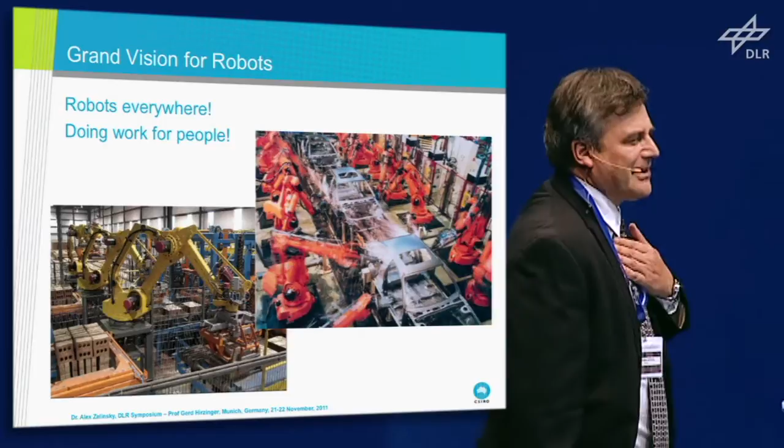If I think about the grand vision of robotics, if you ask anyone when we all started in this field 50 years ago, it's robots everywhere doing work for people. That's where we always thought it would be. However, I think the vision is changing somewhat, but to me it's actually robotics everywhere.

Instead of robots populating the environment—we saw some fantastic talks before lunch from Professor Inoue and Professor Inaba talking about the robot—but I think there's something more there. Our technology can go everywhere in the environment. In other words, robotics is, as Michael Brady says, the intelligent connection of perception to action. That opens up a whole vista of opportunities where we can have robotics.

So imagine, instead of a humanoid robot maybe driving an ordinary car, you could have the car being a robot of sorts. And going further, there's interesting ideas of these sensor networks, which are small devices with microcontrollers, radios, and sensors, populating the environment and working together, gathering information.

That creates a very interesting new paradigm. You can sense and they communicate to each other, then from some gateway go to and maybe control soil moisture, and you can precisely water a farm exactly where it's dry.

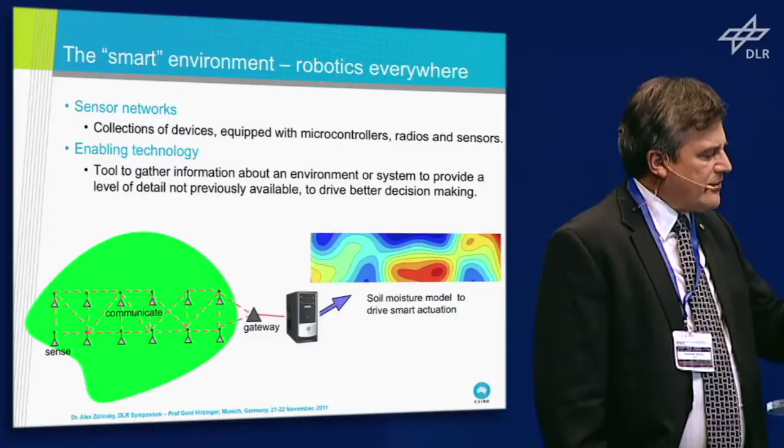That's a kind of classical model, but with robotics everywhere, I believe we can change this paradigm where we actually compute inside the network and act, doing the actuation, rather than pulling information off and sending it centrally. These are the sort of things now possible with the robotics technologies we have today—in-network decision-making and actuation.

I put this slide in a video. Most people who know me know I've never done much work in humanoids, and I always said I can't find an application. I have an application, finally.

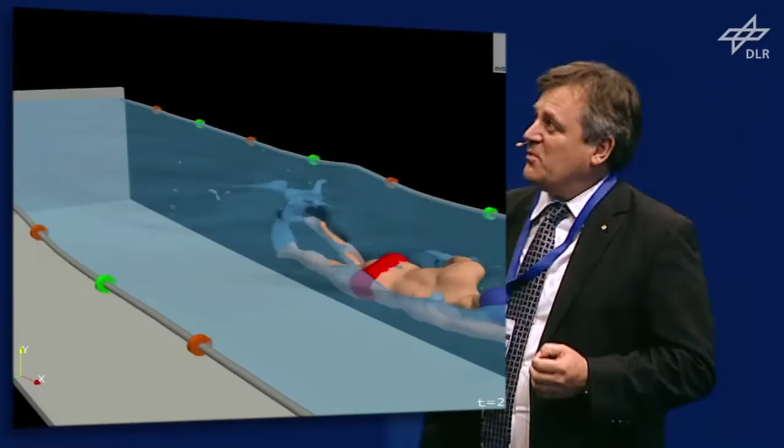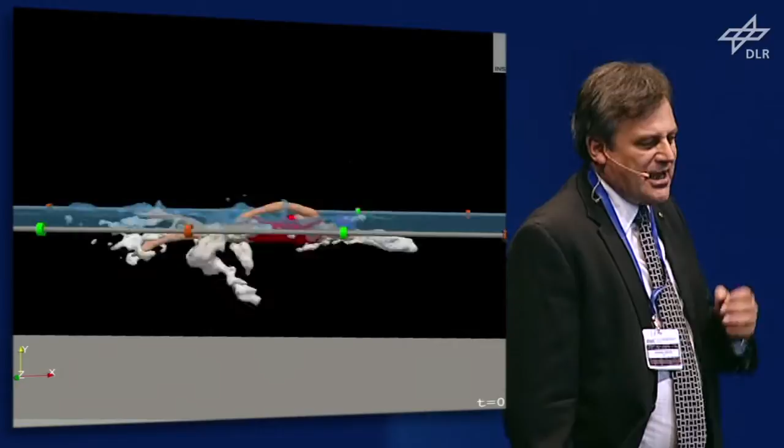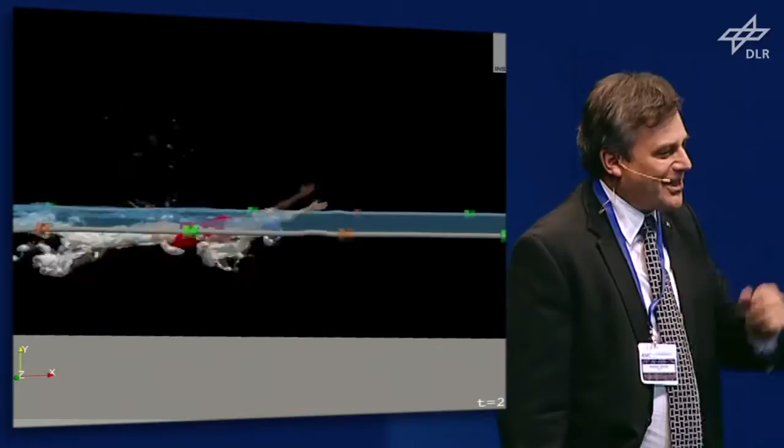This is what we're doing with the Australian Institute of Sport—we're helping train athletes for the next Olympics. We've captured all the motion of the swimmers, and we have a full computational fluid dynamics environment of the water, so you can analyze how the swimmers swim. Using the work of my colleagues in the humanoid area, we've been able to control the swimmer to see if they change the stroke, can they actually go faster, so the coach can coach them.

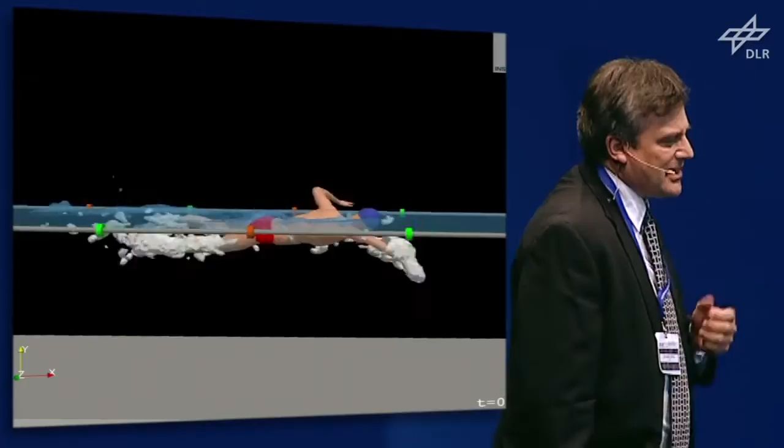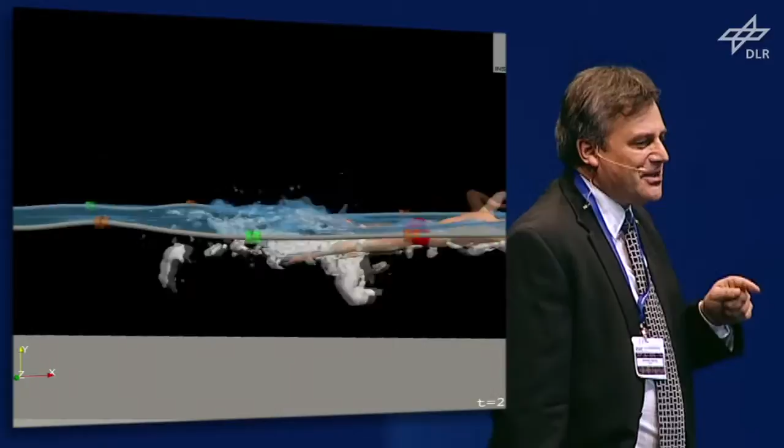So we've actually been able to get this. So when you look at the Australian swimmers in London next year, look for the gold medals from us. So anyway, hopefully this technology contributed.

So really, what are we trying to do with robotics? It's robots for service, and I think we have to remind ourselves why we actually want to have robots. A lot of times when I started, and many of my colleagues and students started, it was just to build something cool and do nice things with technology. But at the end of the day, if you want to create technology for society or for the markets, you've got to do something more effectively, efficiently, reliably, and safely, and deliver a service of value to customers. Someone will actually pay you for it, or a company, or somehow.

I think those things, we sometimes throw away at the beginning. Don't want to do it reliably? Well, if you can't do it reliably, it's probably not going to be of much use. And safely is the other very big point, and I heard that in some of the talks this morning.

So there's a couple of examples there, of course the iRobot, and then I think one of the great examples of a robot is really the elevator. Many years ago, people had to have an operator to take you up and down. Now these things are quite intelligent and they can communicate to each other. They can determine if it's too heavy, when it needs to be going to maintenance. They can optimize their schedules and control each other. Quite an amazing system—very reliable, efficient, and safe, and creates value for customers.

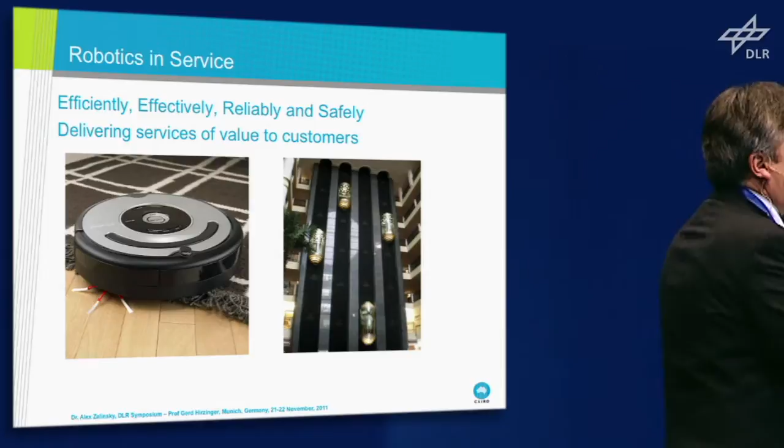So that's the kind of thing we should be aspiring to. We might not think of an elevator as an intelligent robot, but actually in my bones it's robotics in the environment—it's got all the characteristics of what we look for. These are the sort of examples we should be seeking to match.

The other one I think people always look at is safety and liability issues. I know Sebastian's doing fantastic work now for Google with the Google car, after the Grand Challenge, etc. But there is a real fundamental problem here: who bears the liability risks? This is something you really want to understand if you want to bring a product to market. Is it the public? Is it the manufacturer? Is it the owner, or the person who operates it?

Generally what's happened in all sorts of automation and technologies, the manufacturers have been able to shift the liability onto the owner or onto the public. So if you actually create this technology, you must be very, very sure who takes the liability. Currently I think Google has to take the liability—it won't be the car company, it won't be the driver, because you're not driving the car, something else. This may actually limit fantastic technology going forward.

One example we can think of is pilots. We have autopilots—you can actually go in a plane and the plane would fly without a pilot. But do you think anyone would get on a plane without a co-pilot or pilot? The answer is no. A great example was the Qantas A380 over Singapore: its engine blew up and caused a lot of mechanical damage, and it was only the pilot's skill that landed the plane back.

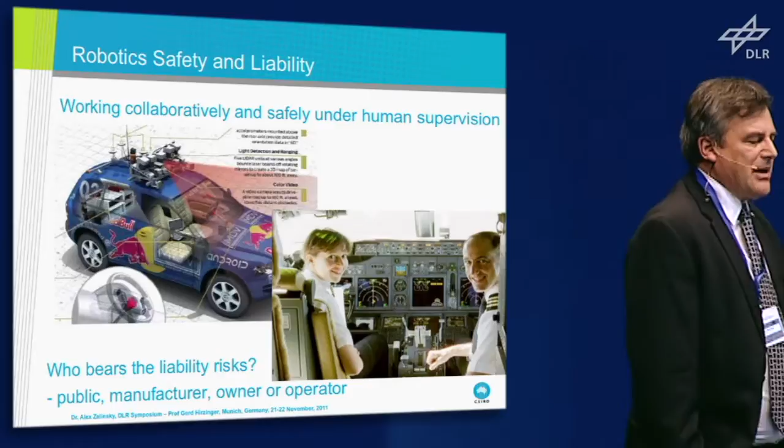But the real thing is, why we want to do things is to solve real problems. For me, what we're going to do for robotics—yes, it's lovely to build cool technology, but it's got to be something that makes industry more efficient, society fairer, or looks after aged people.

It was very interesting. Last night at the Deutsches Museum, I went upstairs with John Hollerbach and others. There were wheelchairs up there, and you could ride them through gravel and a slope of only 6 degrees. I didn't realize how hard it was to operate a wheelchair.

I think there's a lot we can do, and the same goes for elderly people. There's a lot we could do with our technologies to help people. And lastly, the environment—we're at risk of overconsumption, and I think robotics could play a big role here. So, field robotics.

That's one of the things for us in Australia: we're a relatively small country, a large landmass with only 22 million people. So we have to find a competitive edge where we can apply our robotics, and we've settled on field robotics for service—in other words, big applications.

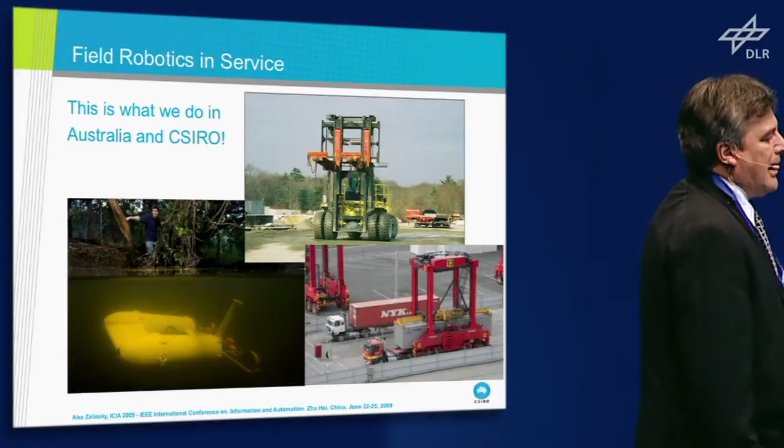My colleague, Hugh Durrant-Whyte, was well known for his work on automating cargo handling and unhandling. What we're talking about here is developing technologies which allow machines to replace people doing difficult, repetitive, or unpleasant tasks, very much usually in dangerous environments.

This has really become a field on its own—it's now even got its own journal. Over the last 4 or 5 years it's come up quite strong in terms of impact, and it's really pleasing to see the technology move into these applications in tough environments, usually operating in complex, dynamic, unforgiving environments.

This is an example of one of the systems we built, quite a small robot, not much bigger than this table, that you could use for subsea mapping or in shallow environments. It's a totally vision-guided system, recording data and then coming back.

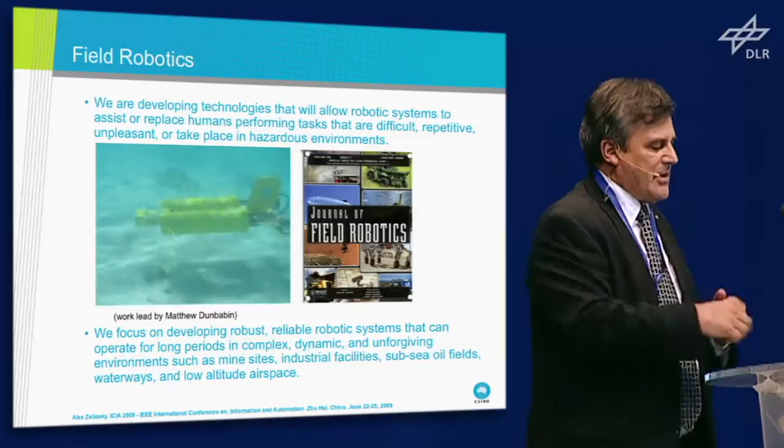But where we've really had our roots, and a lot of this work was done by Peter Corke, my colleague and friend—Peter and some of his workers worked on this dragline automation.

This here is not a crane, it's actually a machine called a dragline—a 3,000-ton vehicle with a boom 100 meters long. They automated that machine and were able to dig. We had to do 3D mapping of the environment, digging, and control. I'll show some other videos of these things.

Basically we've been looking at these systems—they don't operate on their own. There's a driver in there, but some of the functions are automated, so it's people and machines working together. It's not an autonomous dream, although there is the idea that one day the mine will be totally autonomous as each function is automated. But that is a long way to go, though we're moving that way.

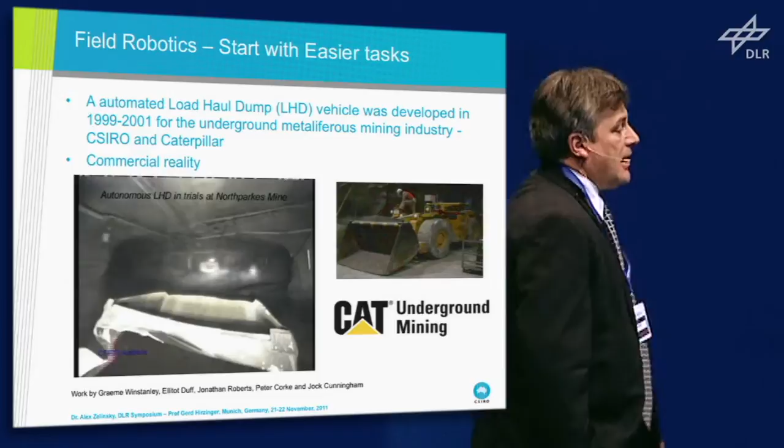This was basically one of these load haul dump vehicles, LHD. You could drive through a mine, delivering material that it picked up and dumped. This is really just basically corridor following, nothing more than that. We were using 2D lasers at that time, but it had to take branches and navigate through the area.

This was back then—we didn't have the mapping technologies that we have today, but nevertheless it could navigate quite robustly and became a commercial reality. Now it's being sold by Caterpillar to mining companies around the world.

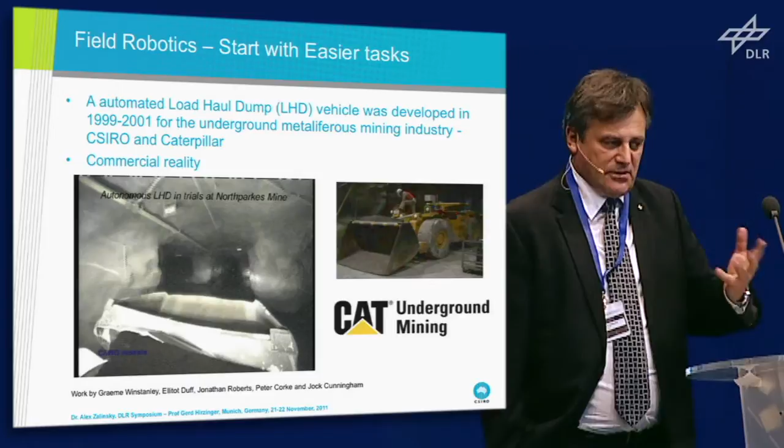But this is a basic sort of task. What we've become more interested in is operating in 3D environments where there is no corridor to run through, so you need a variety of sensors. We're looking at redundancy of sensors, using vision, lasers, and GPS, and trying to fuse many of these informations together.

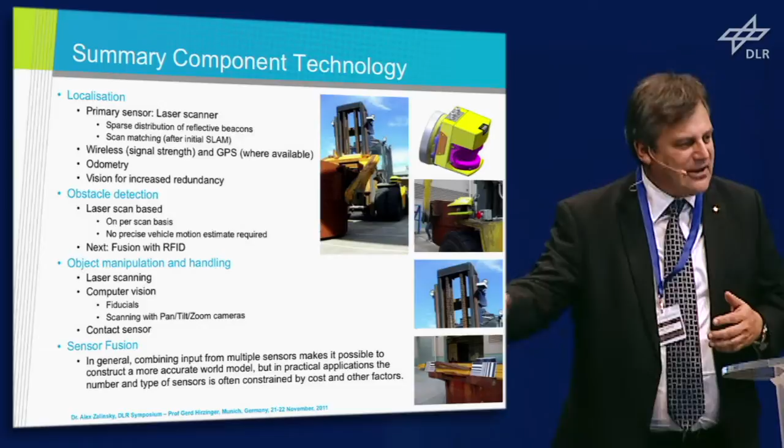But interestingly, of late, the laser sensors—I noticed Professor Inoue was talking about using laser sensors to scan the environment for the robots to walk—and I think lasers are now starting to almost beat out computer vision in terms of performance that we're seeing.

And also with the RGBD systems like we see with the Kinect from Microsoft. Fantastic technologies emerging there.

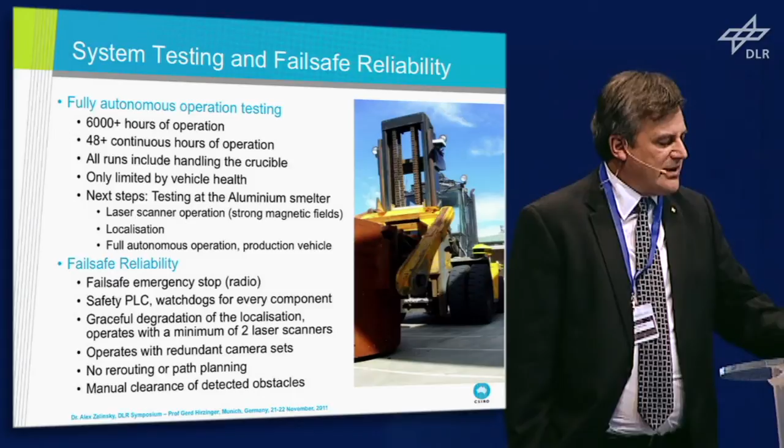One of the things we've been really interested in is systems that can operate in the long term. Can a robot operate continuously 24 hours, 7 days a week, without people around or with limited human interaction? We've tried to run our machines for long times to understand what will break in them, and quite often it's software. Software is the thing that breaks first, many bugs or design faults in our systems. So basically we're looking for ways to degrade gracefully, or when a sensor fails, what do you do to not have accidents? Because these machines, if there is an accident, they're quite big and it can cause severe damage. It's a great way to test things.

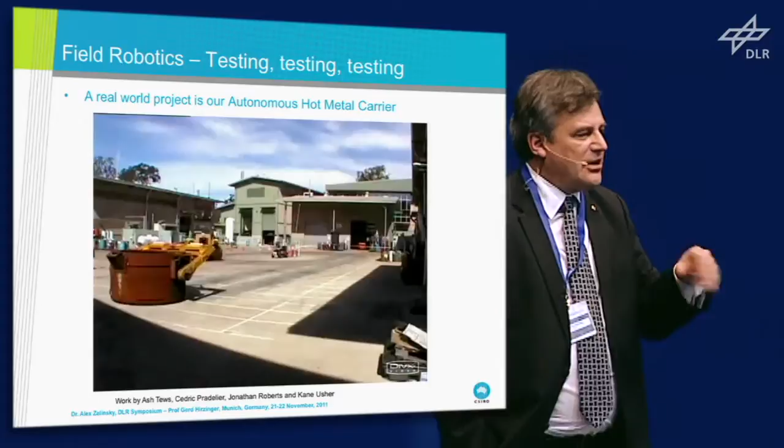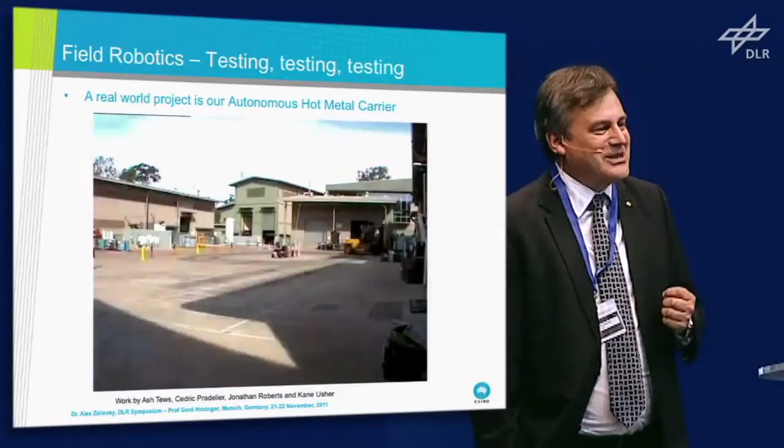This is an example that just ran for a day. This thing is moving around in a compound, picking up and delivering a bucket using computer vision and lasers. It ran all day in different lighting conditions, with people wandering in and out, and it had to stop at times. These sort of experiments aren't that exciting for the students to conduct, but they're very important, because if you want dependable systems, they must actually operate for the long term.

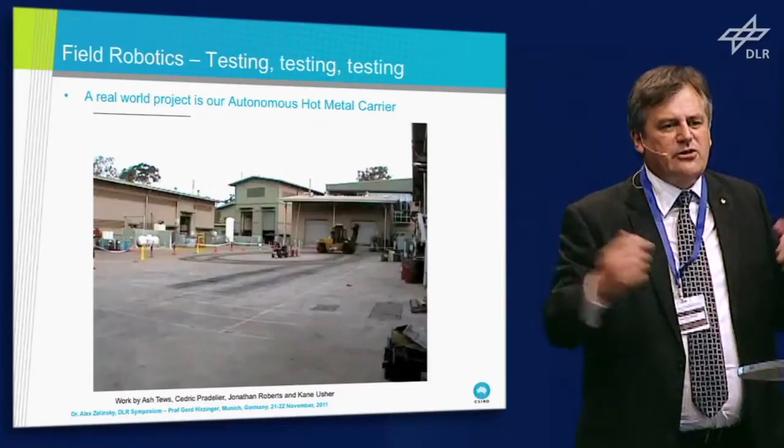We've had to undertake a lot of understanding here—it's an engineering task, but it also tests the operating bounds of an algorithm. Quite often we make an experiment in a laboratory under very controlled conditions, but when you put it out into the real world, the conditions change. So this is testing, but then we can refine.

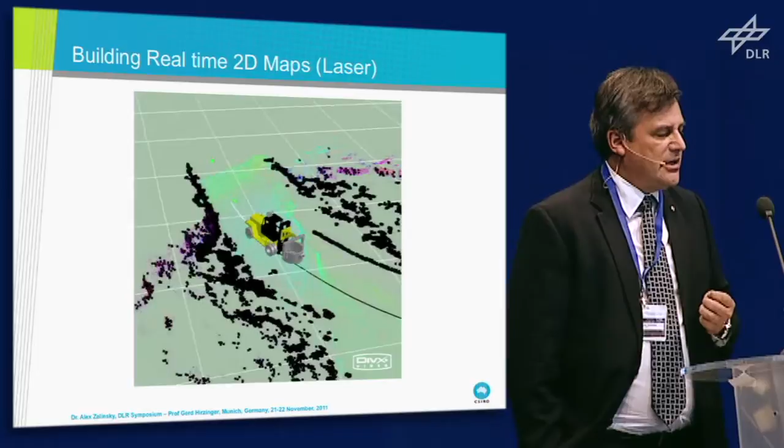So this is an example. We'd make a map, and you can see this is in real time, actually using the lasers here to construct it. There's a little line running along the dark line—that's actually a person walking beside the machine. You can see it's moving along, the person appears in front, and it'll stop. Then the other person walks around to see what's going on, and the machine detects all this—it senses around itself continually. This is a very large machine, basically a forklift, but a very big one, about 16 tons.

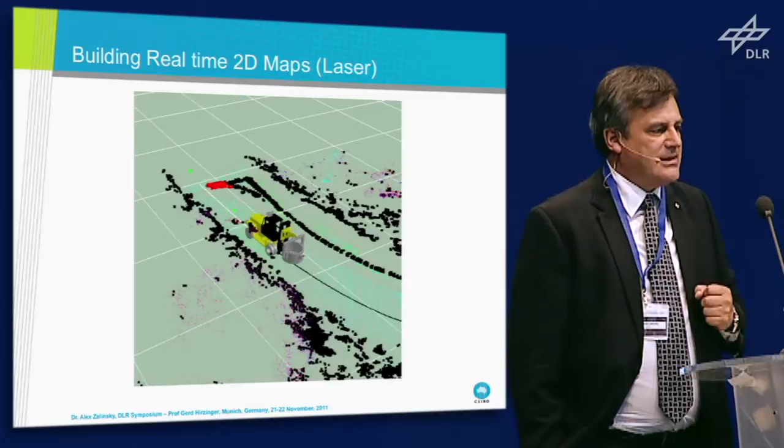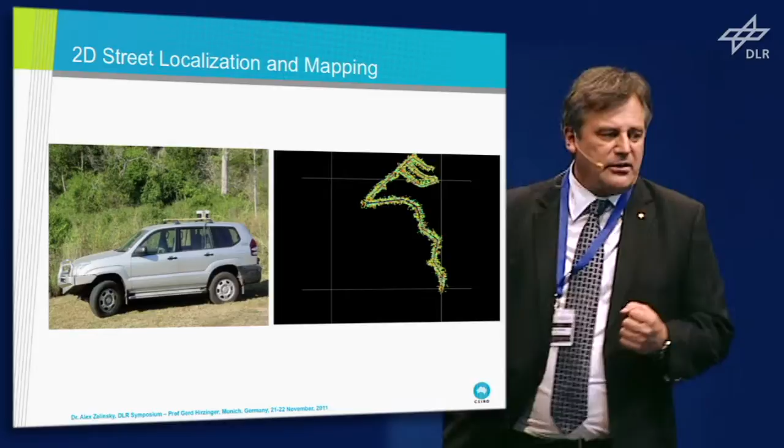One of the things this got us interested in was these lasers, and the great work going on in SLAM. Fortunately we've got two great guys at CSIRO, Mike Bosse and Rob Zlot, who work for me, and they became very interested in this method. Really, it's scan matching—trying to take data and simultaneously solve the localization and mapping problem. It's all been done before, but I think what our guys have done now is build these maps on a large scale and very accurately, without requiring any other sensors.

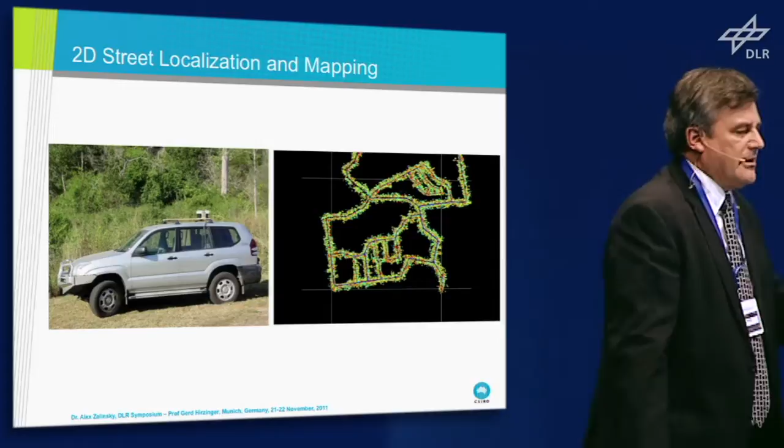In this particular example there's a vehicle with a laser pointing front and back, scanning and driving around a Brisbane suburb. This is just a continuation—the first grid I showed you was one square kilometre, and now it's driving out further. The video jumps around a bit because of scaling changes, but essentially the map grows. The guys drove around the suburbs of the city, 165 kilometres, and the map was built as it went, closing off the loops and inconsistencies.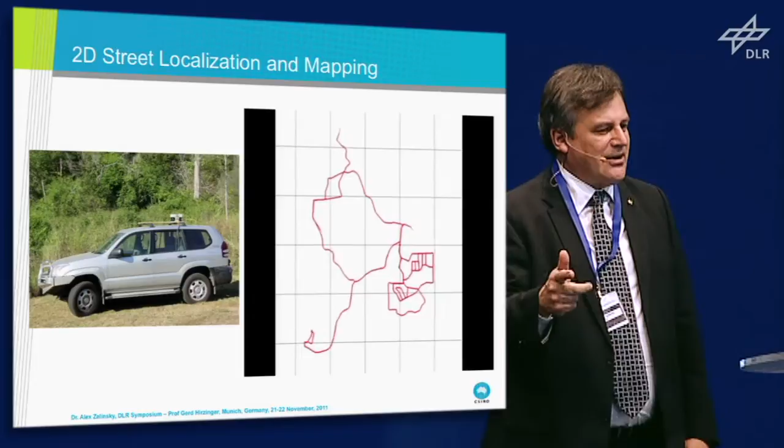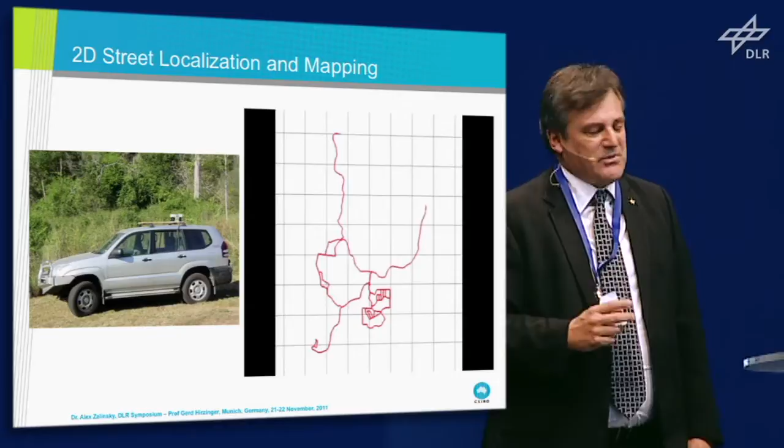So we've now taken this further, and took that laser, which is a 2D scanner, and just put it on a motor and created a spinning laser.

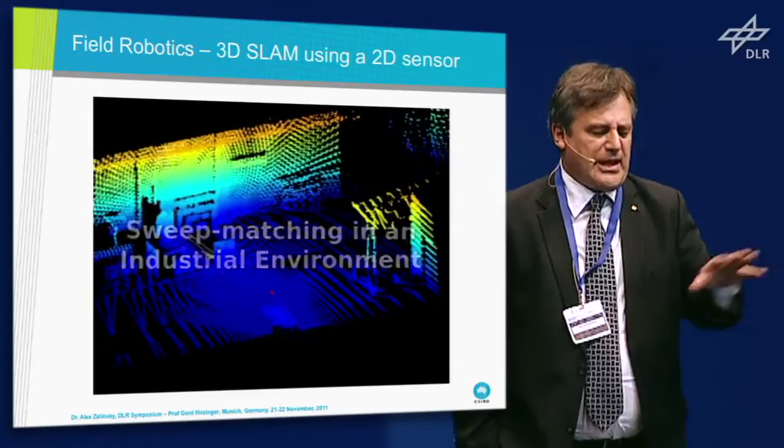So it became like a 3D spinning system, and you could actually get a hemisphere constructed from this. Here's some examples of this at work, in the same environment where that machine was operating before. You can see how well this scan matching is moving, matching up the point clouds quite well and constructing this environment.

And this is now in an off-road environment with trees. With this laser being pointed at trees and spinning around, it's actually reconstructing down to almost the size of the leaves. So you can really construct amazing point clouds and data.

Once you have this set of point clouds, you can create systems that can actually use these and be driven by them. I think this has been one of the big problems in field robotics, the perception problem. But I think we are very close to solving the perception problem. There's another problem, how to reason with all this and how to optimize this information. That's going to be another challenge, but the perception problem in this case is being done.

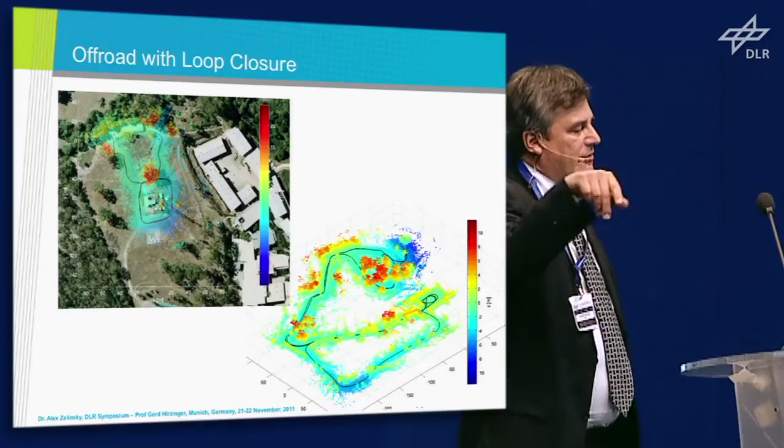What's interesting here is with, again, just a spinning laser, starting off at a small hill behind our facility, they drove around and down the hill and through the car park, etc. And you can see the elevation map actually being generated.

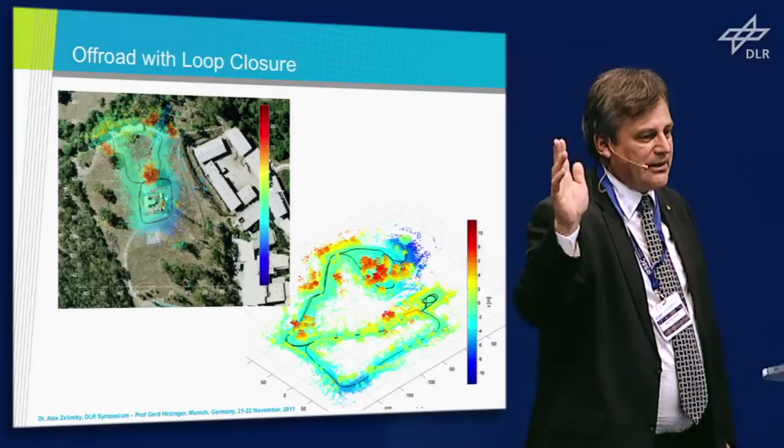So it's not just generating a 3D point cloud, it's actually generating simultaneously 6 degree of freedom positioning, as well as 3D location and mapping. And this is another example where we mapped an underground mine, 17 kilometres in 2 hours, and you can see it's a full 3D reconstruction of the map.

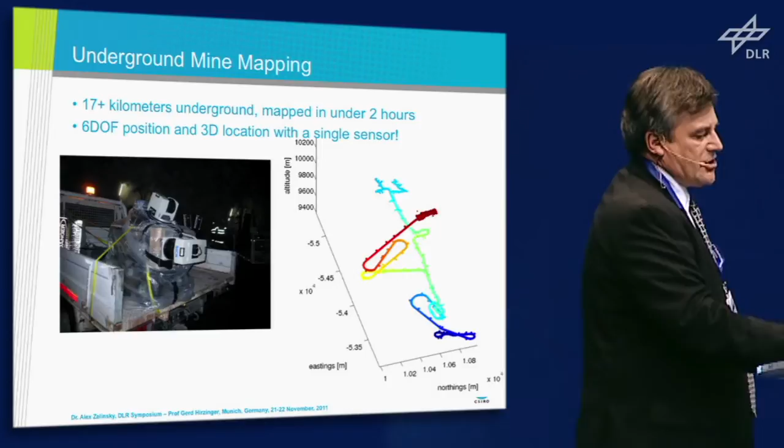We've now actually done it for 3D street mapping, so mapping of streets, and also indoor buildings. And in fact, we've got a small version now, so you can literally hold it in your hand. It's a bit hard to see, just wave it around on a spring, and it actually reconstructs.

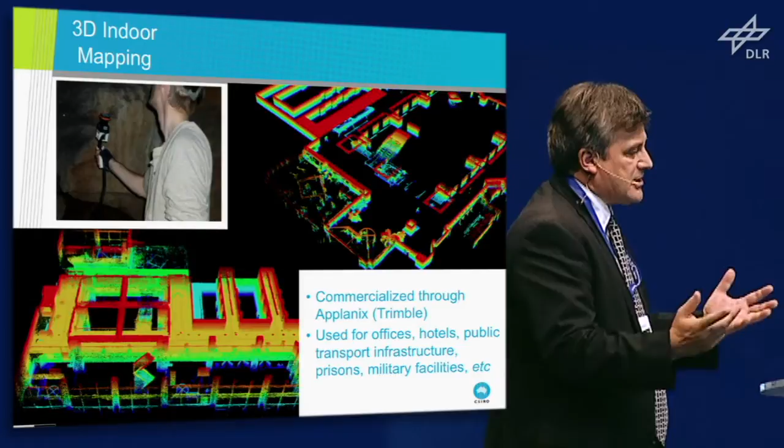So here it's now been commercialized with Trimble, and this company is now using it to map infrastructure, like prisons, military facilities, for security. You might map the building one day, come back another day, do the map again, then subtract the two maps, and then you can see if someone's added or changed something to the environment.

But also it creates the maps now that you can drive robots along with. And this is the things we've been doing with.

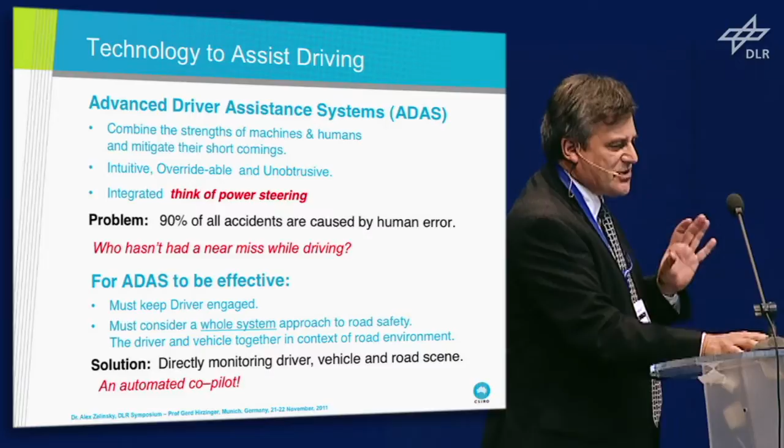So one thing I've been quite interested in personally has been in this driving of cars. And I believe in the co-pilot model. I don't believe in this autonomous vehicle because of the liability issues, quite frankly. That's the issue. But the thing is that the car can do more and more for you. So what you really need is the person has to be put into the loop.

In other words, you've got the vehicle, and the vehicle is interacting with the environment. There's sensors measuring the environment. There's fantastic work that's been done here in Germany over the last 20 years, started with Professor Dickmanns, and continued by people like Uwe Franke, who's here from Daimler, wonderful type of work. But I think what we need is not only sensing the environment, we also need to sense the driver and understand their interaction. Hopefully I'll show you some examples of why you want to do that.

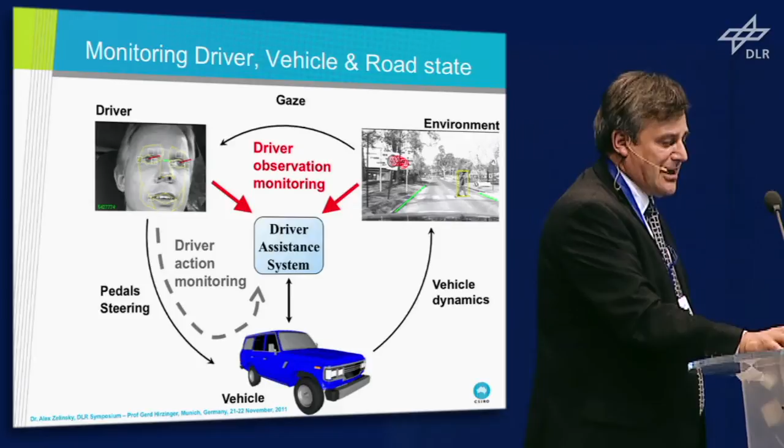So there's many systems that have been done, things like keeping the lanes, lane tracking, detecting pedestrians, detecting objects, reading road signs, reading traffic lights. This is all kind of done, Google's doing those type of systems. And what we want to do is actually see what the driver's doing at the same time. Did the driver notice the red light? Are they going faster than what the speed limit is indicating? If the person is looking at a pedestrian, maybe you don't need to tell them there's a pedestrian ahead.

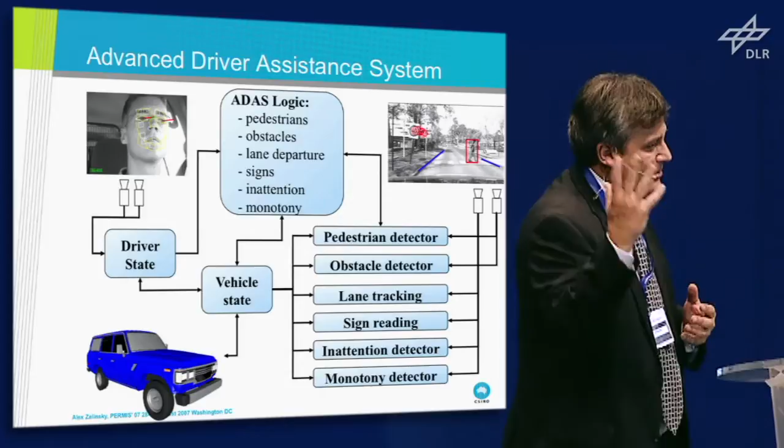This idea of putting them in, or if there's an emergency and it looks like there's going to be a collision, you can probably take effective action.

So the commercial realities of this - if we wanted to monitor the driver, when we looked at these systems, when I started this research, we were doing all the vision tracking of the environment, but there were many people trying to do that. There weren't many people doing drivers and doing that well. So we decided if we wanted to do that well, we should focus on what we could be better at than the others, and we focused on the driver.

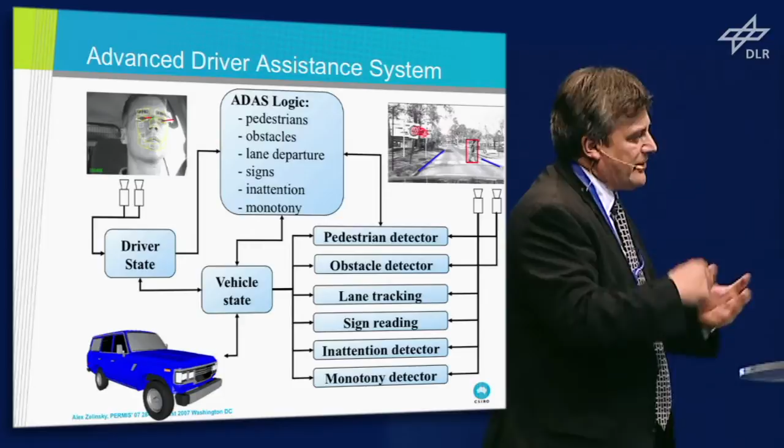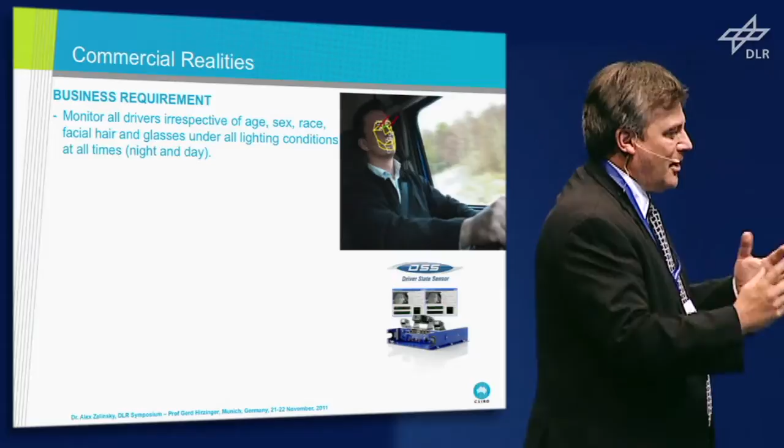Interestingly, when we came down to it, everyone's done sort of experiments - you track some people in a laboratory, face tracking - but here, if you want to monitor a driver, you need to monitor them irrespective of age, sex, race, facial hair, glasses, under all lighting conditions at all times. That's what the business requirements are. That's what the car industry asks for. If I gave you what do you need, this is what they tell you. And it makes it very, very challenging to design algorithms to work with that. We still haven't got there, but we're in the high 90%, 95, 98%.

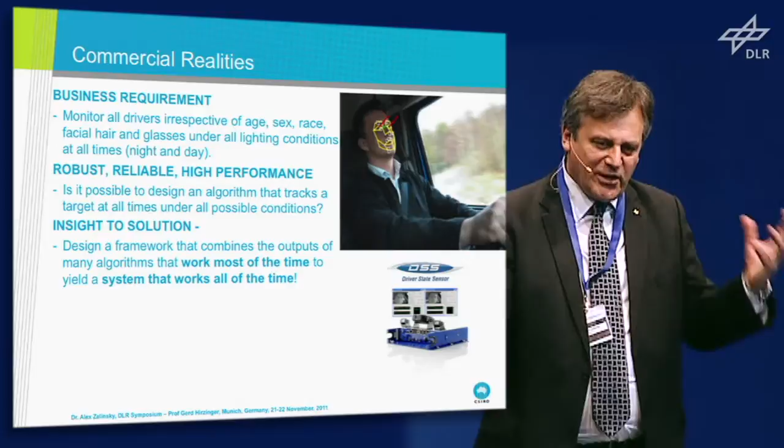So how do you do this? This actually spawned off a whole bunch of research. We started with the idea that maybe everyone seems to be able to write an algorithm that works most of the time, but not all the time. But what if you could have a framework for combining algorithms that work most of the time and create a system that works nearly all the time? So that was basically the insight to our solution, and we actually built that and realized such a system.

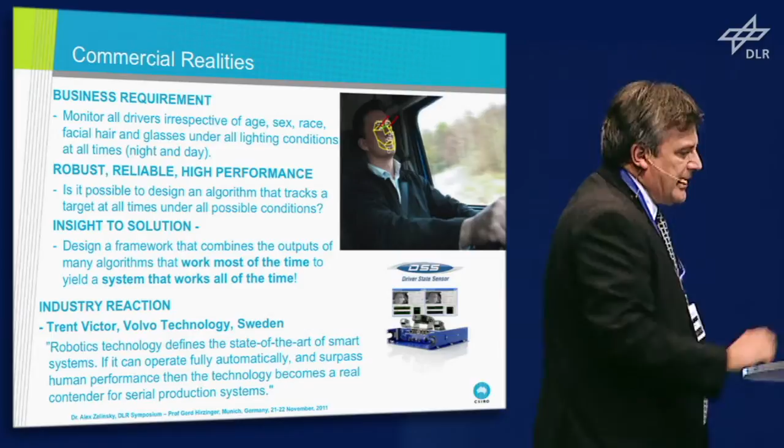But it's been around using a lot of statistical frameworks, writing many indicators. So I'll give a bit of a sense of what the system does here.

In the end, we actually had to make the basic minimum product that the industry wanted - it was eyes on road. Is a driver falling asleep or are they not looking at the road? That was literally what it had to be. Had to be one camera and an infrared sensor to light up at night.

We found out that we couldn't sell it into the automotive consumer market, directly integrated into cars - it had to be less than $250. But as an aftermarket product, it could actually be up to $10,000. We've now installed it into the mining industry, into the big trucks. We have over 3,000 units installed, so if you do the sums, 3,000 times 10,000, it's starting to become a $30 million market now for that product, and it's moving into transportation.

So what was the basic idea? I've got to thank people here in the audience who actually inspired me. We had a lot of feature detectors that we wanted to write to specifically detect eyes, noses, mouths - very specialized features - and also use the idea that a face is actually very structured. We've all got 2 eyes, a nose, a mouth, and there's some average ways that they're laid out. So we basically exploit that - there is a model, and we try to fit a generalized model to the face with these detectors.

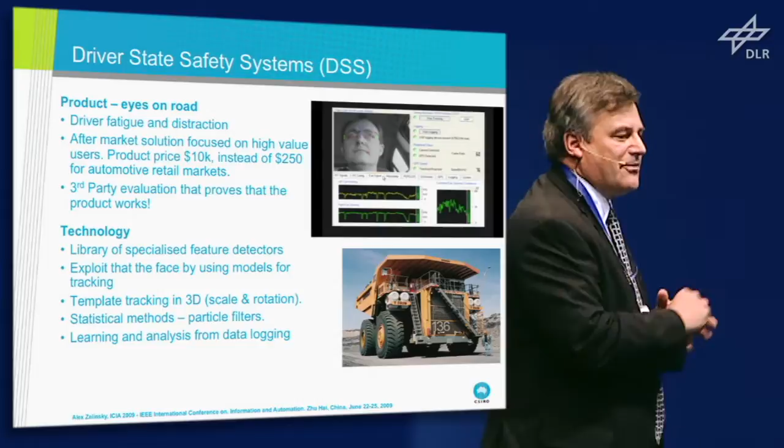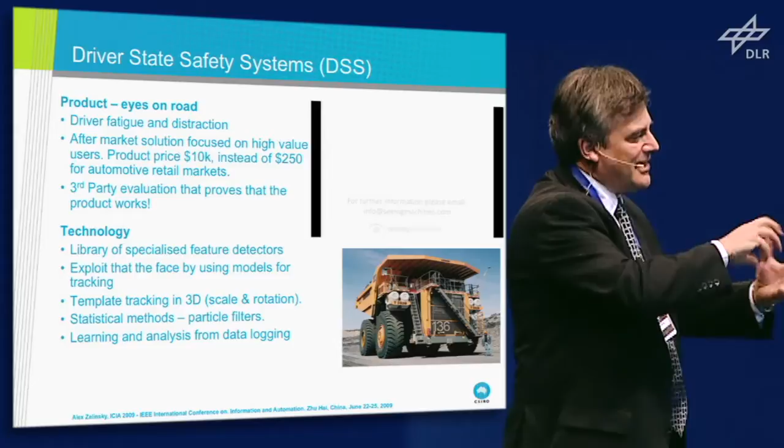But the other important point - I've got to look at Professor Inoue here, 3D template tracking. You guys pioneered that work, and that inspired me. It was initially 2D, but in 3D we scale and rotate, and the hardware has now become sufficiently faster - you can rotate and test many matches very quickly, scale them as well, and have a pyramid. This is how the system was built, using these types of methods.

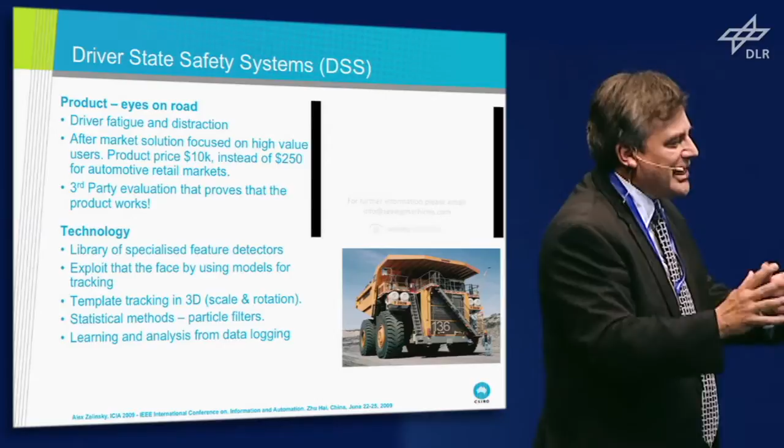The other important thing we do with these products is continually log data - look at all the times the system fails, and then try to understand why it failed. Generally it means the face model we used gets tweaked or averaged out a bit more, we have more history, and we've been able to get it to work better and better. So these are the sort of things that you have to do.

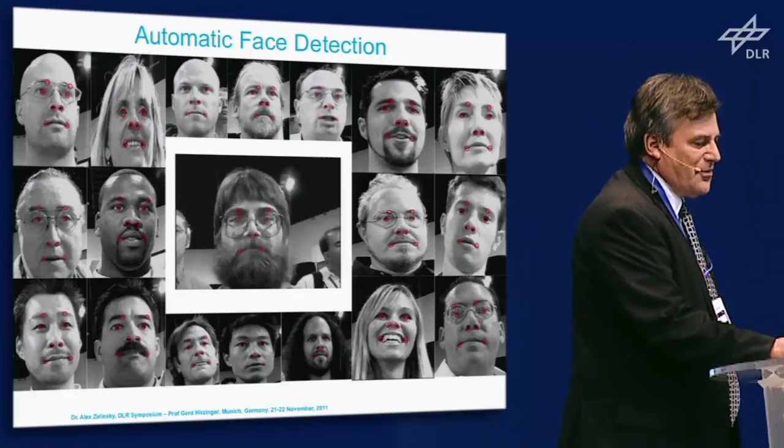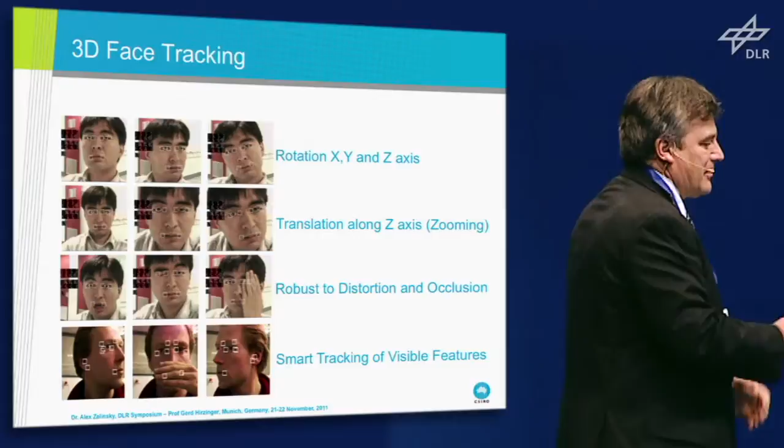Here's some examples. So here you can see this is with the 3D templates. It's actually the full head has been rotated. There's shadowing going on there.

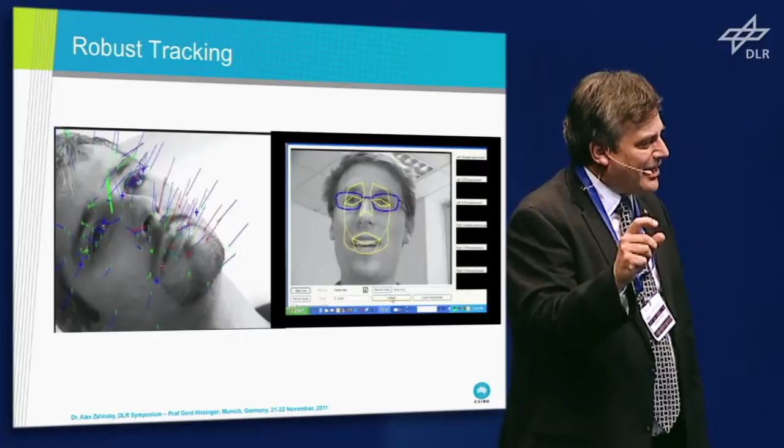Also, one of the other important things any system has to do is detect eyeglasses, and they come in various shapes. It's a very difficult little problem that people wear eyeglasses. If you're wearing eyeglasses, it determines where you should look for the eyes and where you determine whether they're fatigued or not. So this, again, are examples.

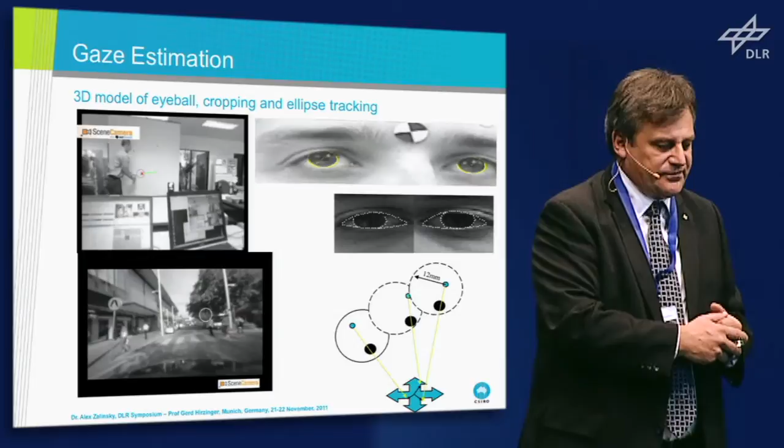Here you can see at the pedestrian crossing, the person looks at the pedestrians. Quite interesting - this is all involuntary. The person is driving, and the system is just looking back at you.

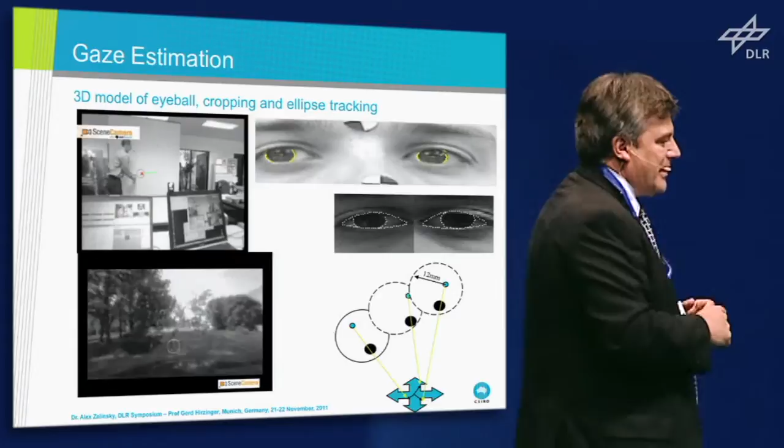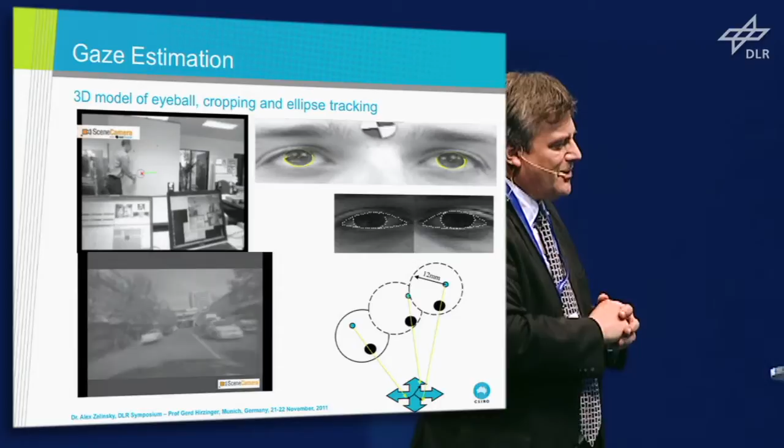So this is what we've been doing, and of course there's a calibration stage, but the insight actually was that we modeled the eyeball. Basically all humans have an eyeball with a radius of 12 millimeters, with very small variance on that. Using projections and asking people to look at a known target at the beginning helped us calibrate the whole system.

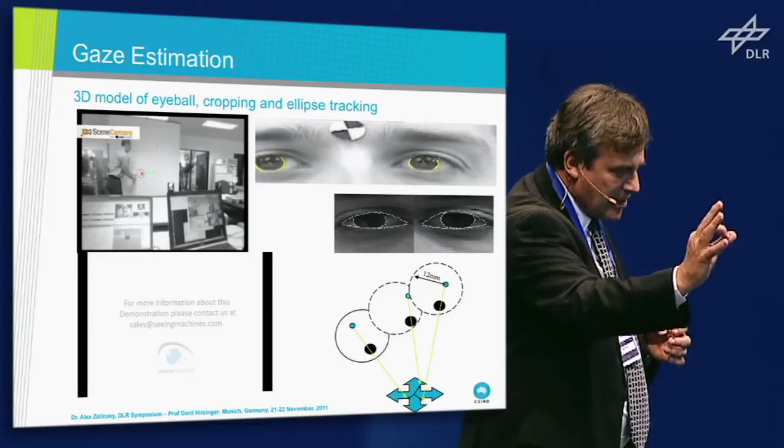Since then, we've made the system even more robust. You can now get this system as an API - I think it's now a product which allows general human-robot interaction. You can just use this system and it'll lock onto any face. This is monocular, web-based camera, not 2D stereo, and actually very high speed, real time, with feature tracking of mouths, etc. So this is what can be done now and used to develop applications.

One of the applications we've been building is 3D displays. And this is where I have to thank Gerd again - I remember we talked about this, and one of your companies was actually interested in partnering with us, thank you very much for that.

There was a nice business relationship started, and we've developed the technology further. You can see there the 3D display has actually been working.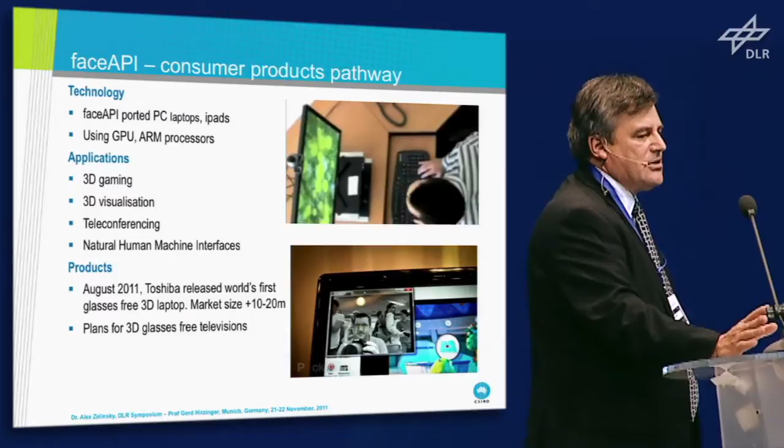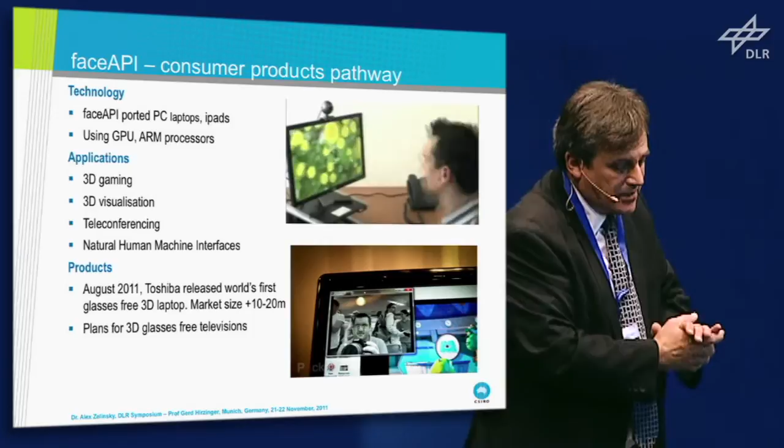So we've now ported this to GPUs and ARM processors, and you can do these sorts of 3D displays. In fact, we've now got it working for glasses-free 3D, and this is the first product - it was released by Toshiba. It's been licensed into every Toshiba laptop and is now out.

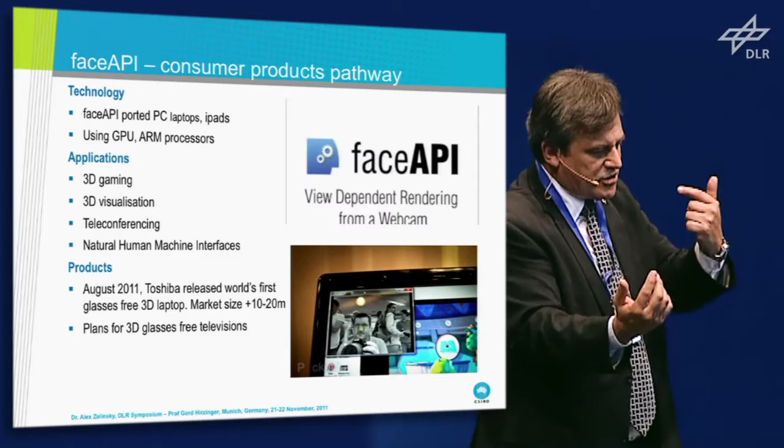Basically what it does is shuttering on the screen, so it projects the image to your left, right eye. Because we know the 3D position of your eyes, it can appear to be a 3D object - just like you used to wear those stereo glasses with the images behind that. So this is what's possible now.

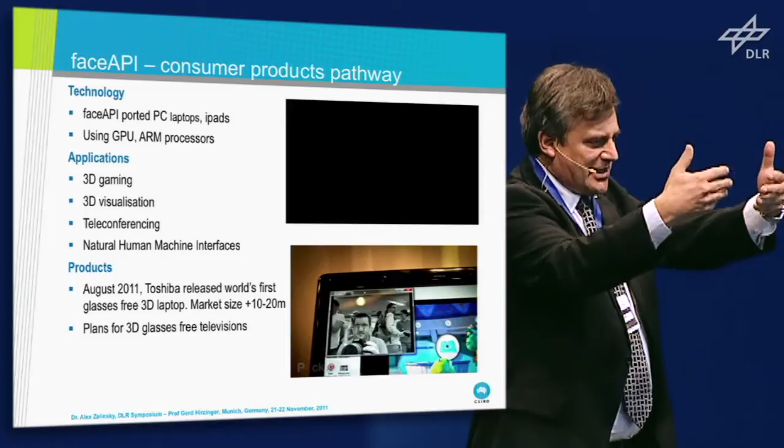Okay, I want to show one of the last couple of videos here. We have been very interested in agriculture and robotics.

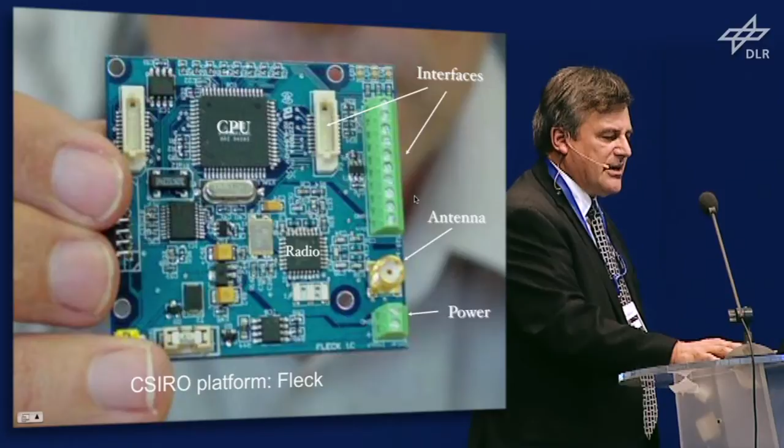So it's based on these small processors. But what's interesting is we've built this, but we've also created a whole bunch of sensors—vision sensors, audio sensors, motion sensors, moisture sensors—and you can basically stack them up and create a system. The system can then be just deployed. You literally drop them anywhere you like, and they discover each other and form their own networks.

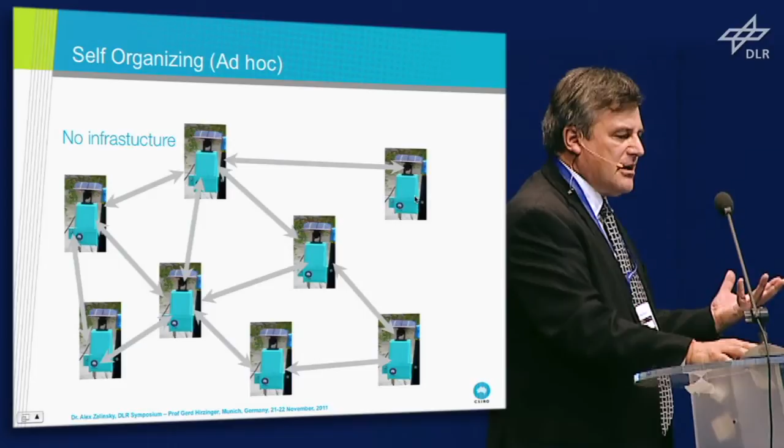What's interesting about these sensors is that you don't need to know their position, and they can be mobile, they can handle failure and rerouting. And this, I think, is a very interesting paradigm.

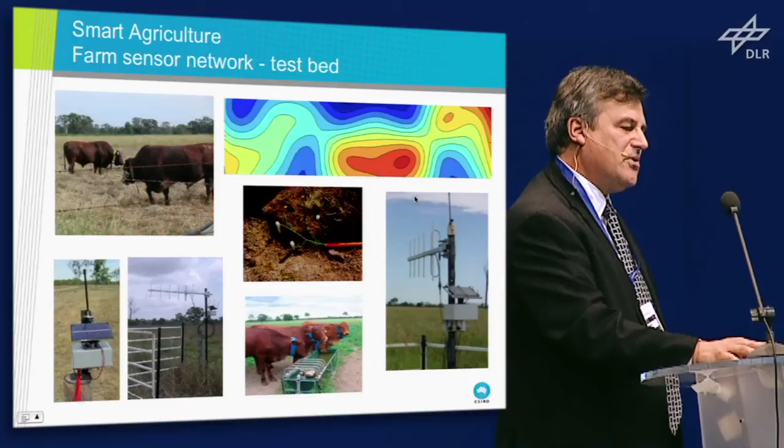So what we've been interested in is actually putting these on cows and in the soil. And interestingly, because in Australia we have farms which can be 100 kilometres by maybe 200 kilometres in size, the radio can't transmit that far. But the cattle can literally wander around the farm and do data muling. When they turn up where they have to drink water, there's a data transmitter, they deposit the data and pick up new instructions, etc.

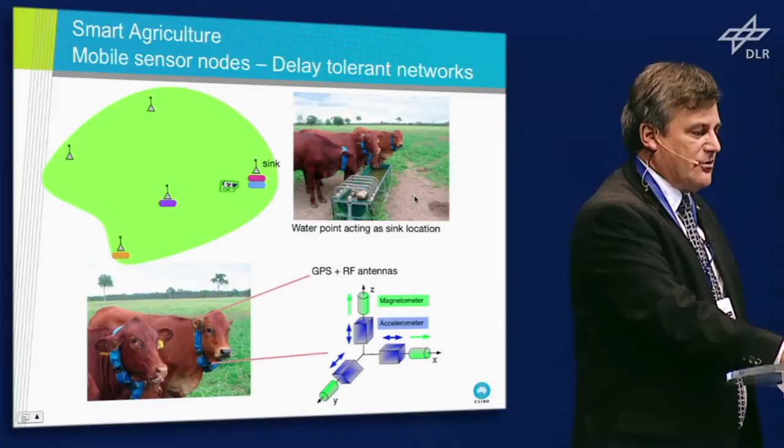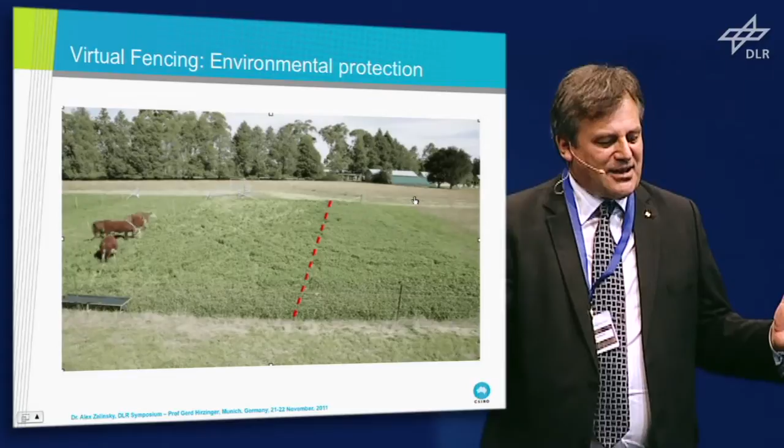What we've also done with these cattle is it's a bit like an electric fence. A cow comes up to a fence, it can be buzzed. We now provide them with a sound that they're approaching a boundary, and the boundary is a GPS boundary. So this is what we've created, a virtual fence. By programming this fence in, the cattle don't go over the line. And this is like robotics, because I can move the GPS locations, move the fence somewhere else, and we can then move the cattle.

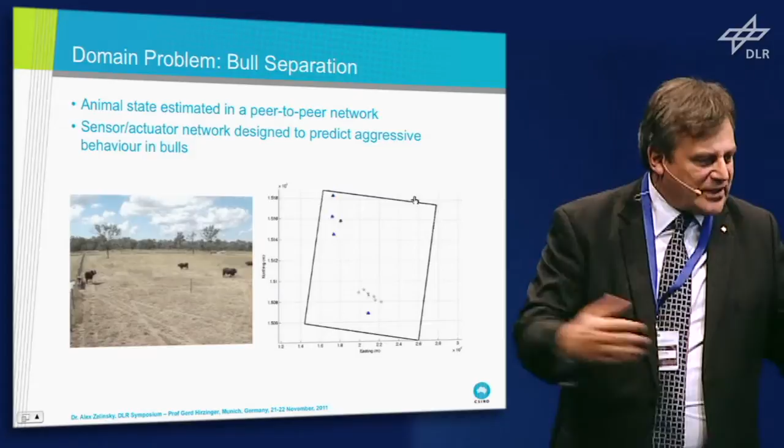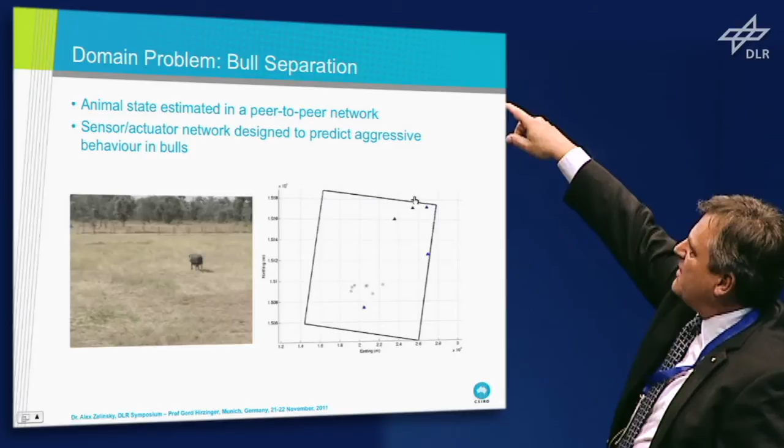Or we can actually separate cattle which is sick and bring them to the vet. One of the things people say is, what about bulls? Bulls fight. Well, in fact, we've actually put sensors on them, and the bulls actually avoid each other. If they try to come together, they get zapped, just like at the fence. You can see up the top there's 4 bulls getting zapped, the triangles—that's the bulls. But there's one bull down the bottom hanging around with the cows, he's smart, and the other 4 are away doing their business, following each other around.

But all of a sudden, you can actually start to control this environment, and this is one of the things that we're trying to do here. I've missed one slide, but anyway, it doesn't matter.

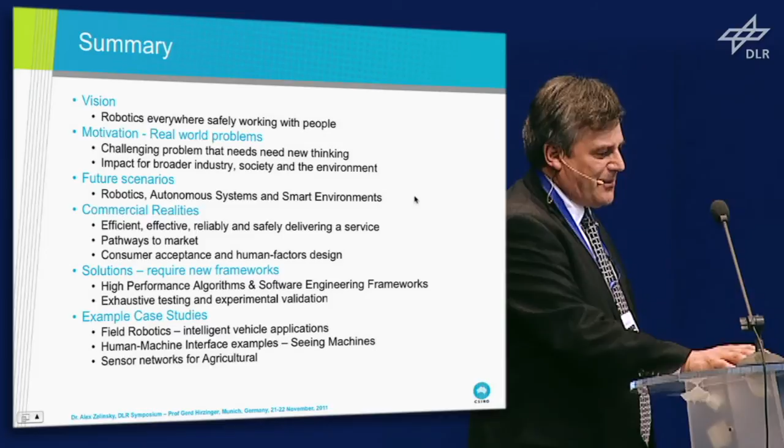I think it's about robotics everywhere, working safely with people. I think real problems are a good motivation. I think it's more about not just robotics, it's autonomous systems and smart environments, but also thinking of commercial realities. This is why we don't have robotics out there in the marketplace—they have to be designed for human factors. And the other important point is high performance; you cannot walk away from that, and software engineering, frameworks and exhaustive testing and validation. So now I've given you some case studies today, so thank you very much.